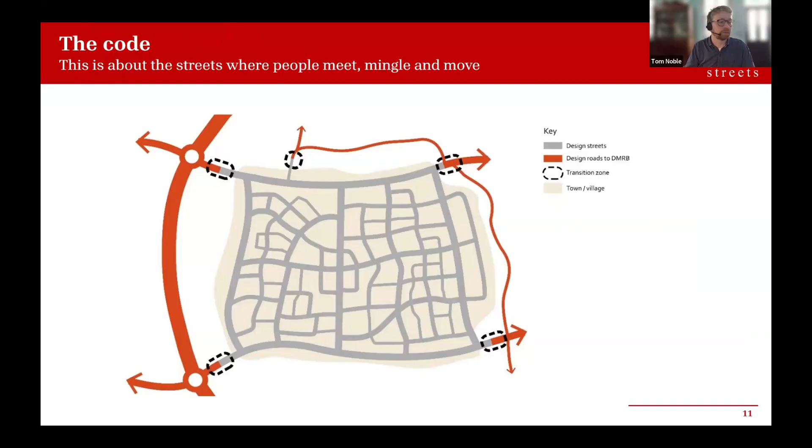So this covers everything from the high level, looking at these really high level principles around layout, where we should use DMRB, where we shouldn't, what's the hierarchy of users, down to these details around materials and greenery that relate to the character of Surrey and give it that sense of place.

As I said, the code is very visual, so we have a lot of diagrams. One thing we really focused on was the street typologies, bringing in all the good stuff from Manual for Streets and updated guidance, along with all the research that Create Streets has done on what makes streets healthier, happier, and more prosperous.

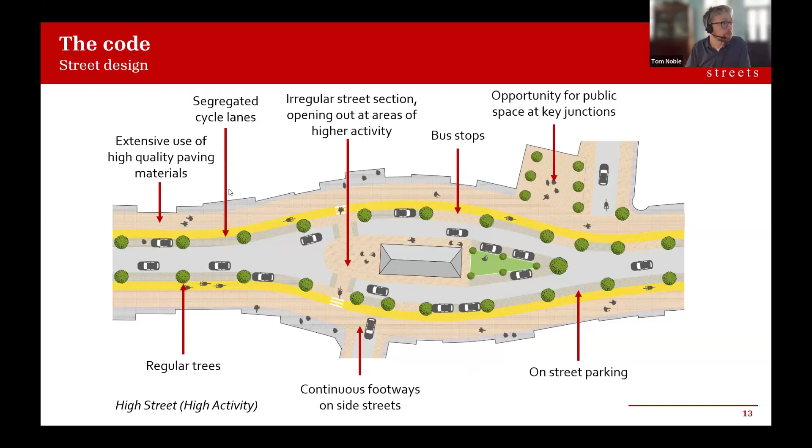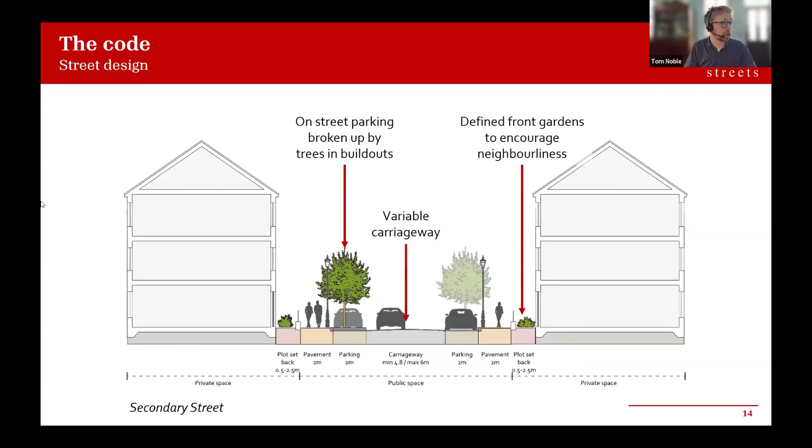That included sections that really set out clear dimensions. So essentially, we worked towards a book of street typologies and a clear hierarchy, down to the rules around continuous crossings, greenery, etc. Really trying to humanize the streets, down to the level of greenery as well. So lots of good precedents, lots of diagrams, lots of clear rules—musts, shoulds, and coulds.

So how has it been used? Well, we helped the council put in place and ran training sessions for officers. Some key learnings from that were just how useful it could be. And here's a good example of where it was applied.

So this is a very typical development, medium size, no clear street hierarchy, very dominated by parking, lack of street trees, lack of differentiated materials—just tarmac, wall-to-wall tarmac, and junctions with wide radii, basically everything that puts cars first rather than people. So this had gone through planning.

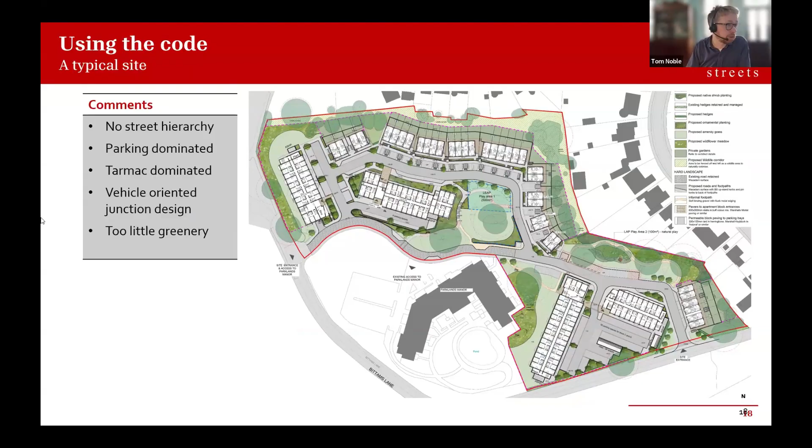At that point, obviously, there's not much you can do around the layout, etc. It's too late for that, but it just shows that the code was able to quickly make some significant changes to this design. So straight away, we could put in a proper street hierarchy using the hierarchy we set out in Healthy Streets for Surrey.

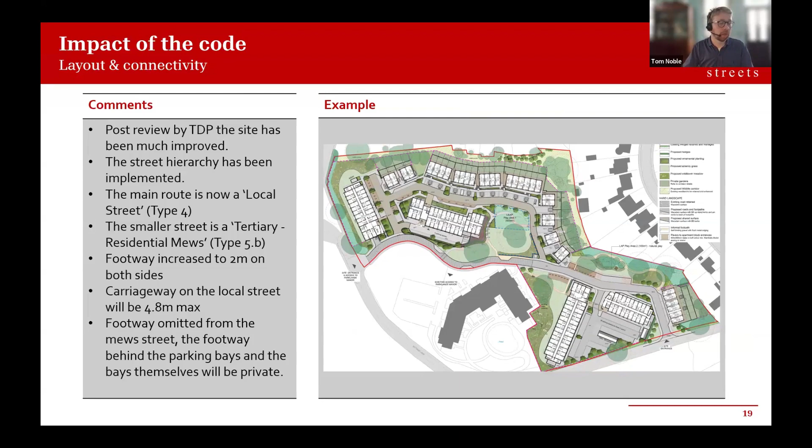We could then look at materials, so we now have differentiation of materials, which helps define those hierarchies. Instantly add more street trees, change how the parking works—more on-street parking, more unallocated parking—and put in things like continuous crossings as well. So all the good stuff.

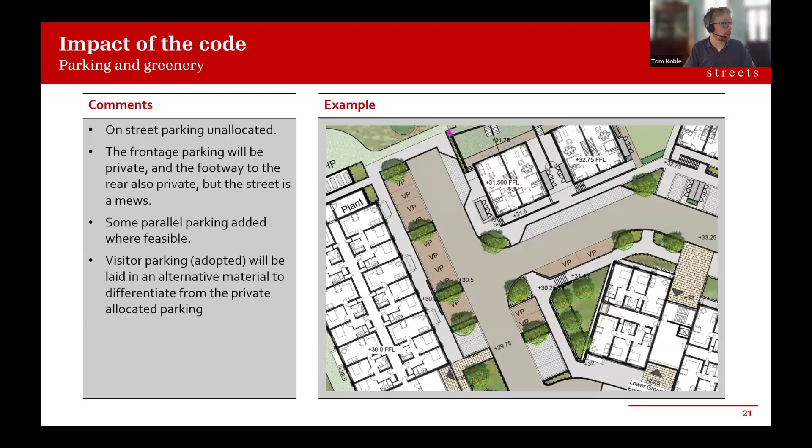And the feedback we had was that it's very effective and very helpful for doing so. So just a few final thoughts while I have a minute left. It brought clarity—we kept it clear, we kept it visual. We had those clear rules around must, should, could.

Our latest codes go a bit further. I think one thing about Surrey was perhaps it was a little bit too wordy, and we're really trying to up the number of diagrams and reduce the amount of text.

Everything seems to be downstream of street typologies. If you can nail those street typologies, everything hangs off that—your rules around materials, greenery, dimensions, setbacks, even those urban design considerations as well. So that pattern book approach has been really powerful.

From personal to process—what we mean by that is officers really liked being able to use the rules. Each rule had a number, and in their feedback to developers, they could clearly say, as per rule 4.x, which says must, you haven't complied with this. So there's very little argument there; it really clarifies what you need to do.

Online, absolutely the way to go. It's searchable, easy to disseminate. You can share it very easily, and it opens doors for all sorts of features that we haven't explored yet, but perhaps things like street configurators, etc.

And then a code allows you to have your battles once. So we bake in all these standards—we talk materials, we talk greenery, we discuss all these things with officers and stakeholders first, bake it into this pattern book, which means you're not then having these arguments each time.

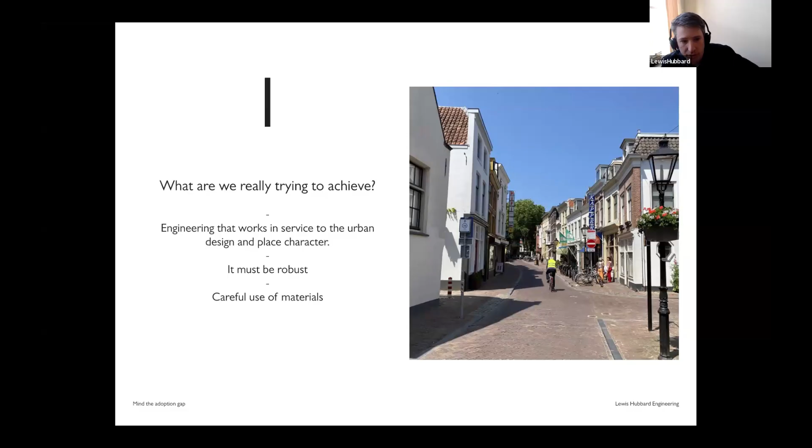Secondly, engineering design must consider use, materials, geometry, levels, drainage and utilities all together. If we don't consider those things all together, in engineering terms, the road will probably fail. I think that's kind of a message to people procuring design - clients, local authorities - because quite often you see layouts and geometries set out, and then someone adds in a bit of drainage or thinks about the utilities later, or indeed sometimes with utilities, not at all.

We've all seen utility scars in roads going all over the place, and the way they can be disorganized with other elements of the street is a real problem. I think if those things aren't all considered together, it will fail in policy terms as well.

Street infrastructure is where many of our policy ambitions are realized. That's in urban design and planning ambitions, but also environmental ambitions with utility infrastructure, whether that's electrification or communications. So streets are conduits of infrastructure as well as streets in and of themselves.

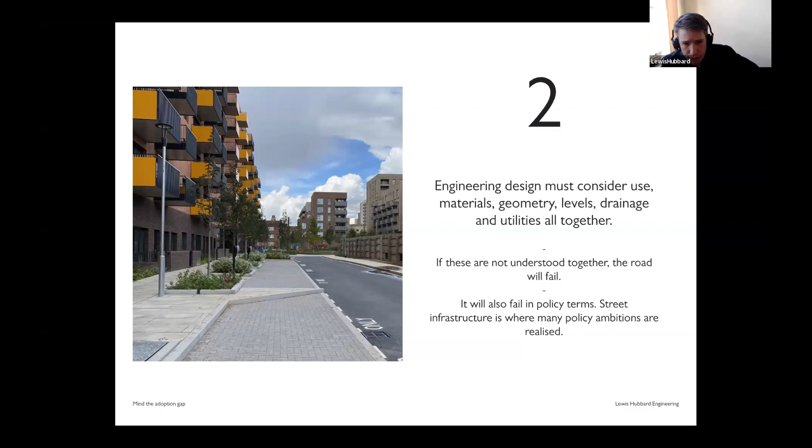Third, street design should be the composition and assembly of a normal set of component parts. Ordinary places can be beautiful. This is my view: that ordinary places can be beautiful, convivial, and generous with a clever assembly of normal materials.

There are, of course, some instances where special materials are worthy and really bring value. But for ordinary places, I think normal materials suffice, but can still be wonderful.

Echoing what Tom and Jack have said, highways authorities need to make clear what is acceptable. Unfortunately, I think there's a culture amongst engineering design teams where people assume things aren't acceptable, and therefore won't necessarily try to pursue them. So almost the prompt needs to come from the highways authority.

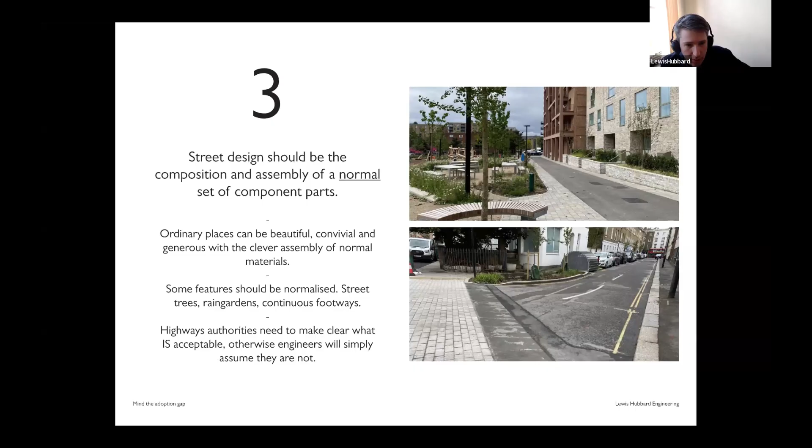And fourth, all roads fail eventually. It's just like anything mechanical that you would expect to fail if it's worn and torn over time. Robustness, build quality and maintainability help.

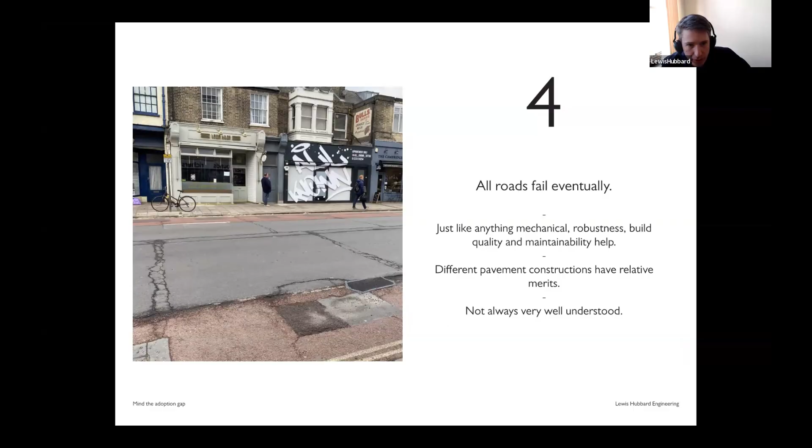Different pavement constructions have relative merits, but I don't think they're always very well understood. So I'm just going to give a little study mentioning a few of the things that I don't think are always understood about different pavement surfaces. First of all, asphalt - ubiquitous.

It does have many merits. It's cheap and quick to lay and repair. It's quite adaptable. It creates a smooth and grippy surface when in good condition, and gives easy access to utilities, and is relatively easy to reinstate. But it's vulnerable to rutting, potholes, deformation and wear, as we all know.

I think we all also know that reinstatements and repairs are very short-lived. They often open up again shortly after being patched. I think asphalt confers a prioritization of cars, and it can be monotonous when widely used.

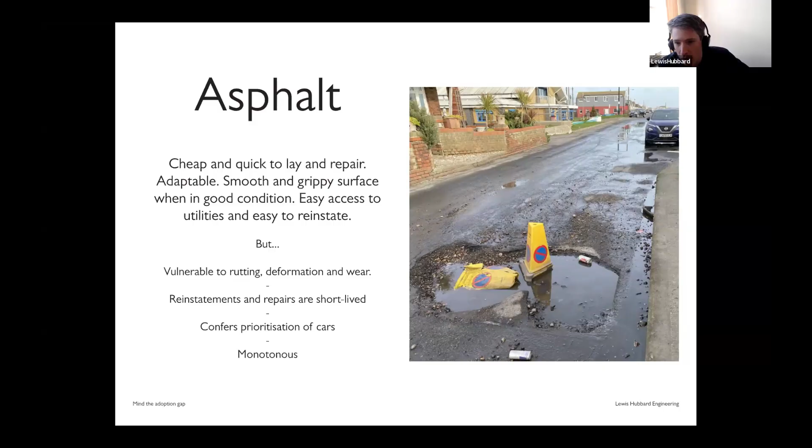This image is of a seafront road in Jaywick. It's a slightly unfair indictment of asphalt, given that this road is not adopted and has its own specific engineering challenges with the adjacent seawall and so forth. So I thought I'd be a little kinder to asphalt and say it can be used suitably and be quite pleasant in certain places.

Natural stone setts and slabs, of course, are characterful, natural, and can be strong, but they're often laid on mortar beds and concrete bases, which in engineering terms is known as rigid construction. Rigid constructions often fail at the joints in the concrete base, so the idea that it's this uniformly strong thing is not always true. They require perfect construction, in my view, and therefore probably site supervision to be robust and mitigate its inherent weaknesses. And it can be an expensive use of materials, especially if the base is reinforced.

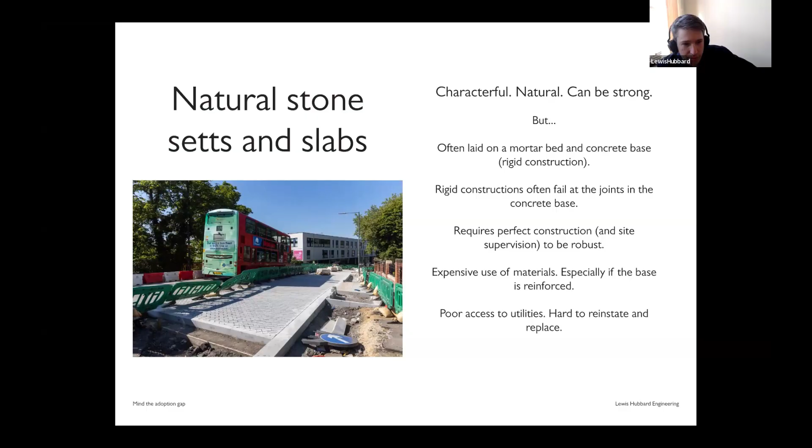Here's an image of a road in Bexley where the base is being laid beneath some granite paving. Once you've done it, it also gives you incredibly poor access to utilities - it's a one and done. It's really hard to reinstate and replace. So there's a sense of permanence about it, but I think it really has to be got right if you're going to do a rigid construction at all.

And then clay and concrete block pavers - again, they're strong, resistant to potholes and rutting. They give more effective reinstatement and can add character. But they have slower repairs than asphalt, which is why some highways authorities find them quite challenging.

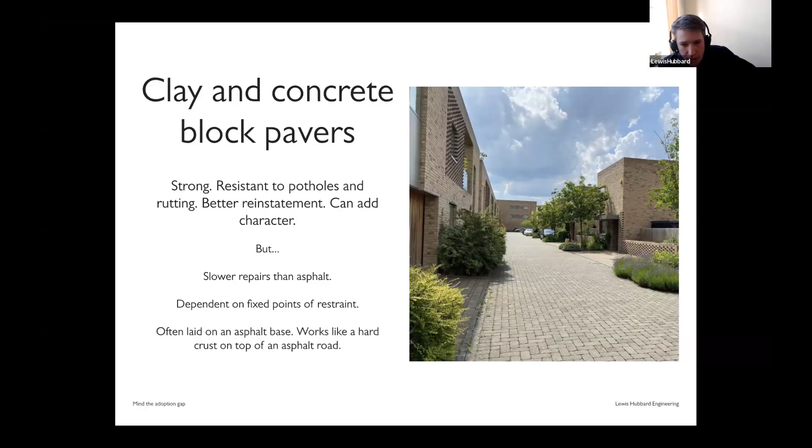They're like any flexible pavement construction, very dependent on their fixed points of restraint all around, so it's part of the engineering design. People don't always appreciate that they're often laid on an asphalt base, so the concrete pavers work like a hard crust on top of an asphalt road. The pavers do offset some of the layers of asphalt, but it's not one or the other, it's a combination of both things.

My reflections on the engineering design of roads: clearly there's more than one way to build a road, and we need to use all the tools available to meet those objectives set out at the beginning. I've heard from an American a term I really liked - we often use the term healthy streets, described as complete streets, which I think confers an idea of engineering integrity to all those other layers of street infrastructure.

Another idea I'd like to share is that a lot of the design decisions for block paving and natural stone paving use the British standard BS 7533 Part 101. A lot of design decisions are manifest in engineering terms using that document. It's not terribly complicated - I think non-engineers would benefit from giving it a study and review to help understand some of the design decisions they might make. For example, natural stone setts on a high traffic road might end up leading to a reinforced concrete base, which might then make you change your mind on what you're proposing in the first place.

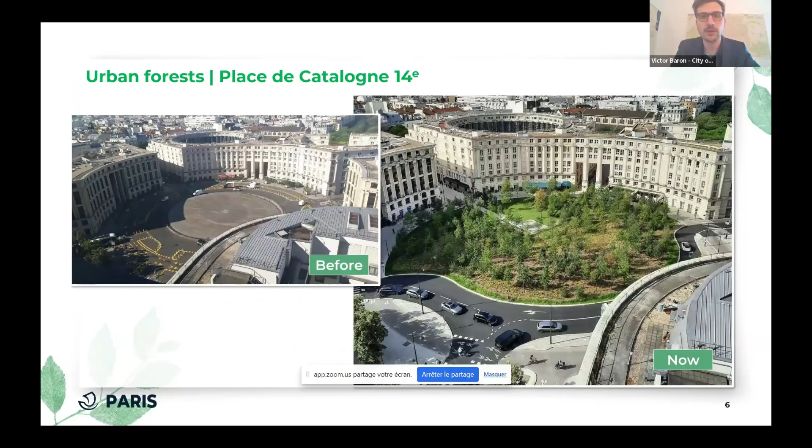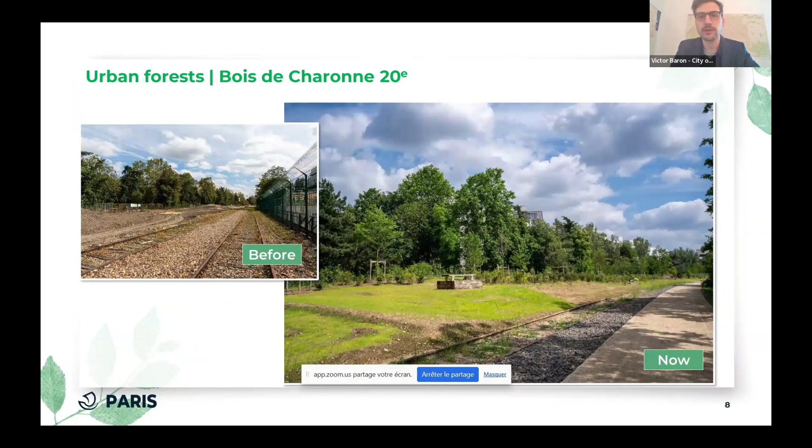But greening public space needs innovation, it needs new ideas, it's not just building parks. So Anne Hidalgo, as soon as she arrived, asked for a study to create urban forests, kind of pocket squares dedicated to nature with trees planted at high density. Here's the first urban forest in Paris, in Catalan Square. And here's the second urban forest, on an abandoned railway and freight train station.

Finally, I just wanted to say a few words about this participatory initiative, which would translate as 'beautify your neighborhood' in English.

In 2020, during the election campaign, Anne Hidalgo faced many attacks from her opponents regarding the number of public works happening at the same time and place across Paris. So in 2020 she appointed a dedicated deputy mayor, and they created a specific initiative to mitigate roadworks, planning and gathering them together neighborhood by neighborhood.

It concerns both maintenance and new public space projects, with each neighborhood attributed a public budget for public space transformation. It actually gave power to the arrondissements, the boroughs, to make these changes with a clear action framework and timeframe, and to associate citizens more efficiently, sharing with them the tricky decisions that needed to be taken. Here are some of the examples we carried out in Paris within this initiative.

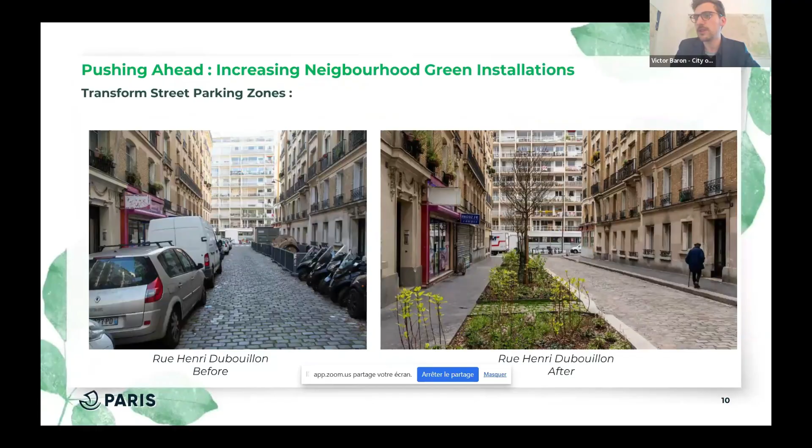And of course, Cool Streets, as you may have heard about. So, thank you, sorry I've been a bit long, I think.

No, thank you, that was fantastic, and probably many things that a lot of our audience haven't seen before. Right, final speaker, last but not least, back to the UK and the scale of our housing challenge. How do we ensure that our new developments are actually healthy?

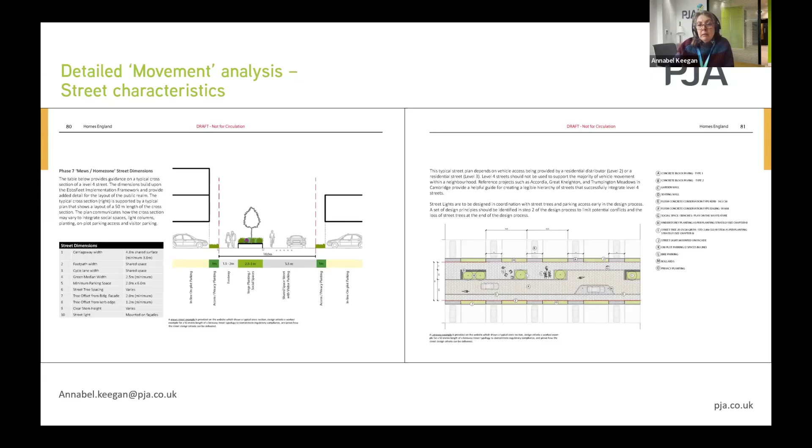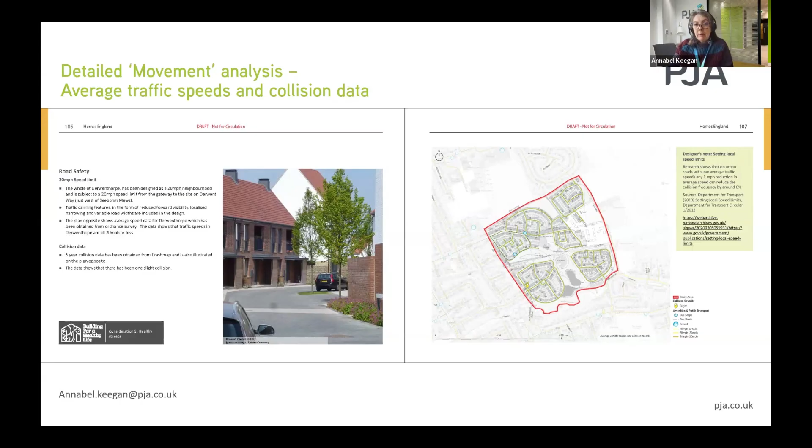We've also, as part of the work, collated average speed data and 5-year collision data as part of the case study, so we can really demonstrate some of the safety concerns. We can demonstrate that they are actually achieving what they set out to do in terms of delivery of slow and healthy environments. And we've also provided helpful designer's notes where, if people aren't so familiar with the technical process, we've provided helpful links to take you through to information that people might want to use within that process. We've also aligned all of the information to the Building for a Healthy Life considerations, so people can see how it relates back to its parent document.

We've also gone out and captured some really nice drone imagery for some of the case studies. A picture paints 1,000 words in terms of the quality of the case studies, and we've tried to really annotate and show what it is about those case studies that demonstrates good practice. What do they do differently? And it's not always about fancy materials - it might just be in terms of the structure or the street types that they deliver.

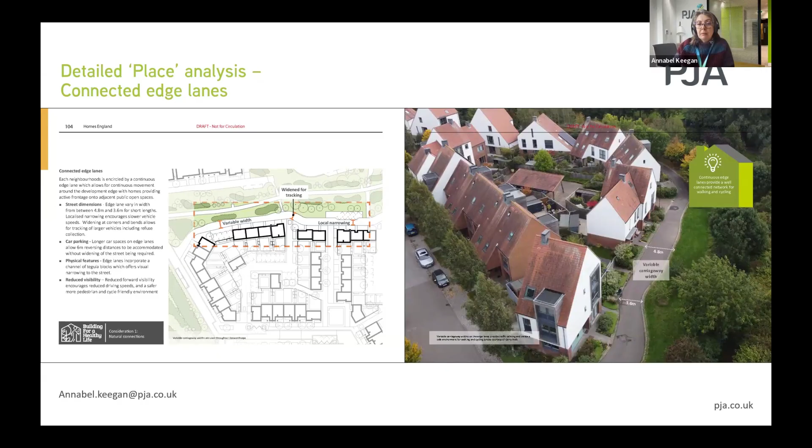In terms of the things that I think are most important in terms of that delivery, Becky mentioned the supplementary planning advice note.

So we're aligning Streets for a Healthy Life with the supplementary planning advice note that we've also been working on with ATE. One thing worth stating is that technical approval is governed by the Highways Act, whereas everything we're currently securing in terms of design quality is secured by the Town and Country Planning Act. So in terms of where things typically go wrong, it's the transition from planning to technical approval. As Becky alluded to, the authorities doing that well are the ones that join together those two processes and bring those teams together, recognizing this is a complicated and fairly unique process - certainly not something France suffers with, or even Scotland, where these aren't separate processes.